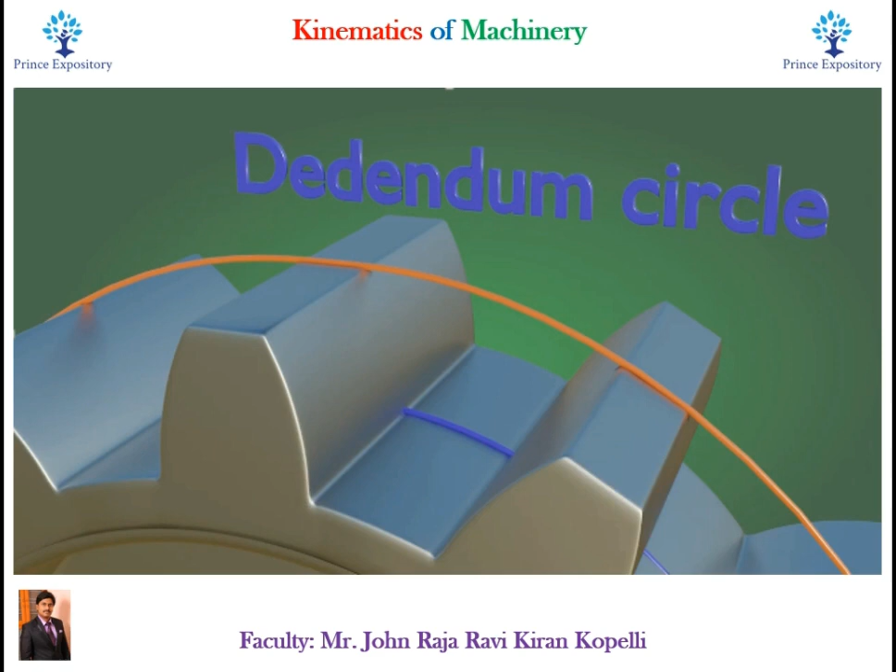Addendum circle. It is a circle drawn through the top of the teeth and is concentric with the pitch circle. Dedendum circle. It is the circle drawn through the bottom of the teeth. It is also called root circle.

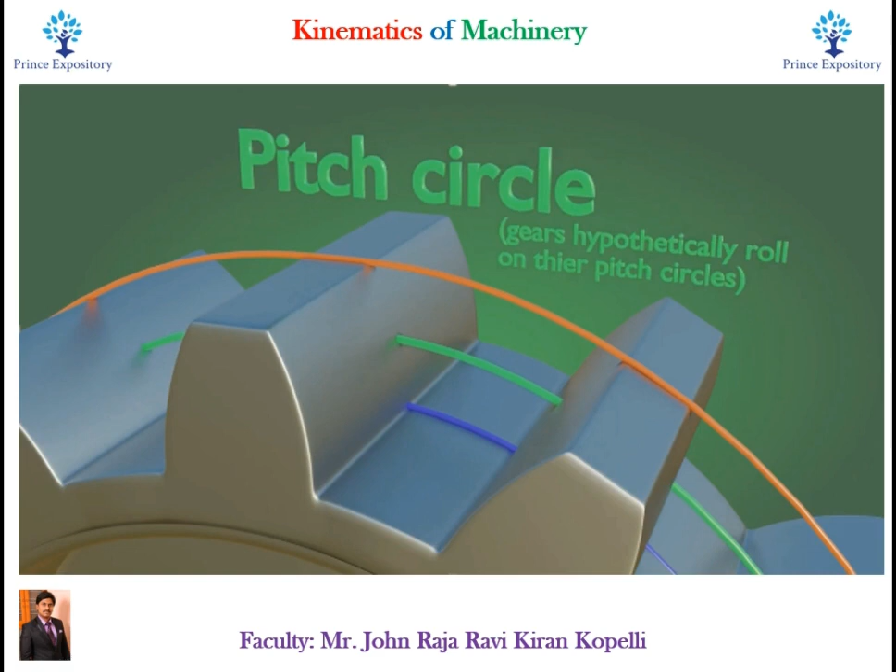Pitch circle. It is an imaginary circle which, by pure rolling action, would give the same motion as the actual gear. Pitch circle diameter is the diameter of the pitch circle. The size of the gear is usually measured with the help of this pitch circle diameter. It is also known as pitch diameter.

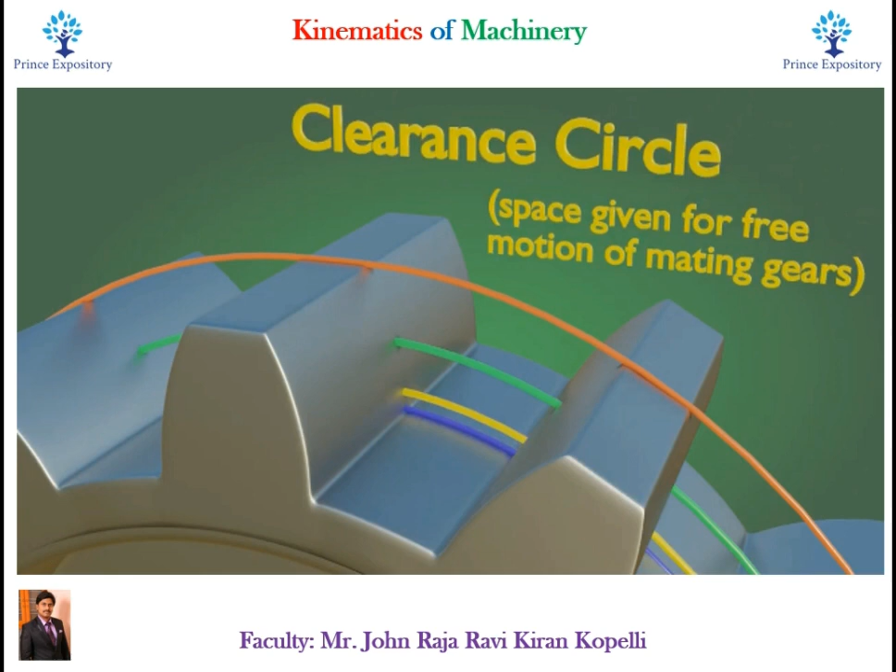Clearance circle. A circle passing through the top of the meshing gear is known as clearance circle, and clearance is the radial distance from the top of the tooth to the bottom of the tooth in a meshing gear.

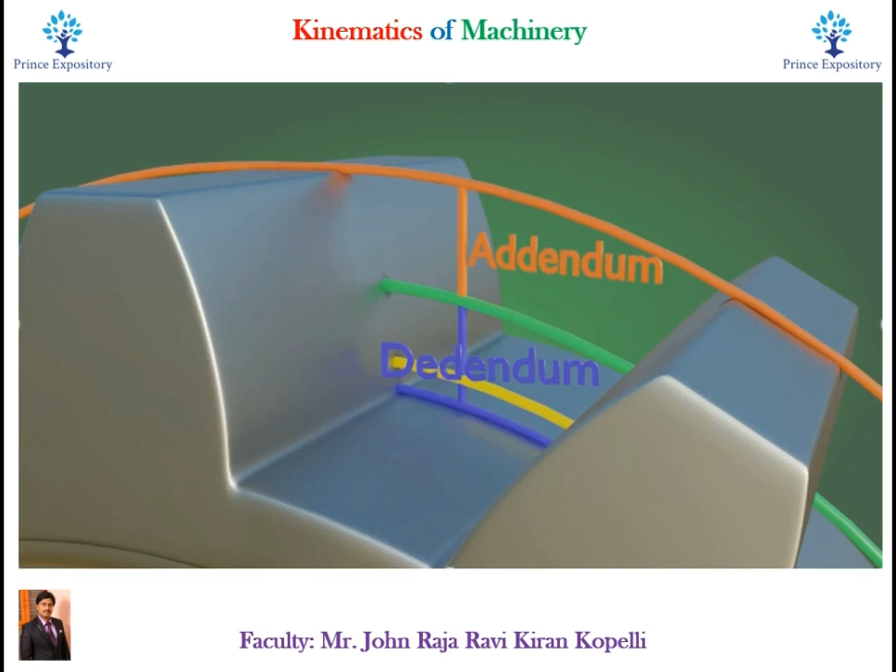Addendum. It is the radial distance of a tooth from the pitch circle to the top of the tooth. Dedendum. It is the radial distance of a tooth from the pitch circle to the bottom of the tooth. Total depth. It is the radial distance between the addendum and the dedendum circles of a gear. It is equal to the sum of the addendum and the dedendum.

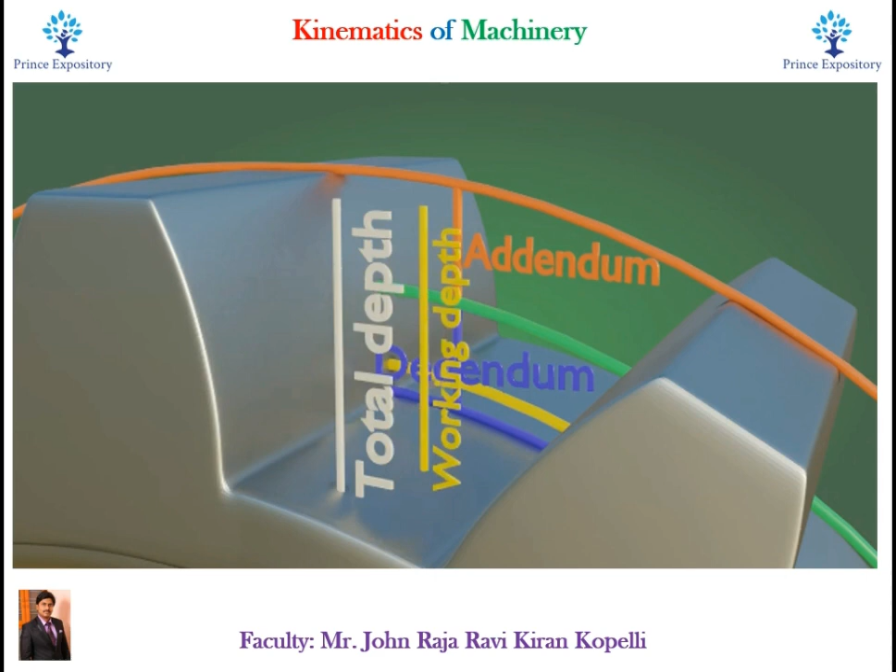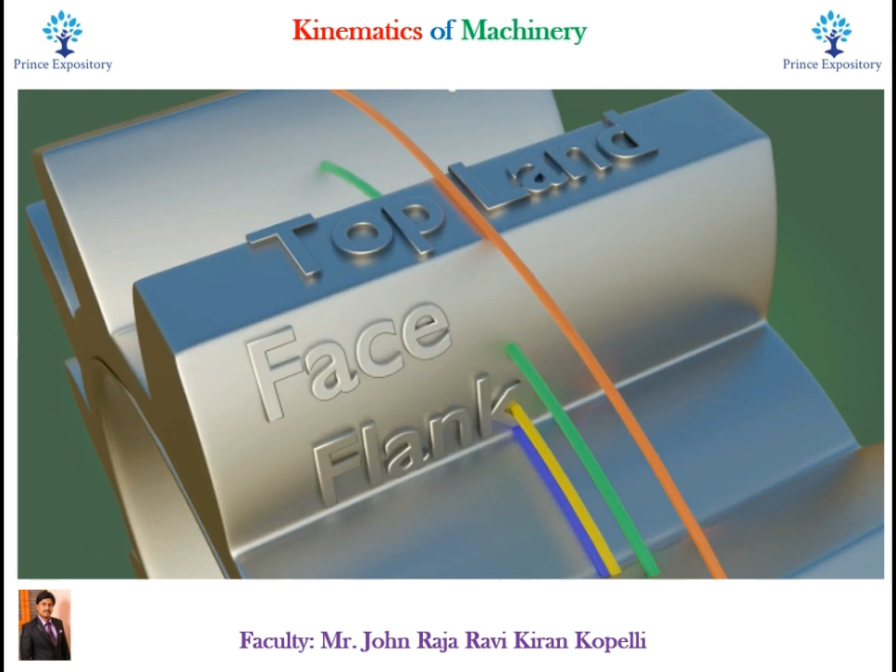Working depth. It is the radial distance from the addendum circle to the clearance circle and is equal to the sum of the addendum of the two meshing gears. Topland. It is the surface of the top of the tooth. Face. It is the surface of the gear tooth above the pitch surface. Flank. It is the surface of the gear tooth below the pitch surface.

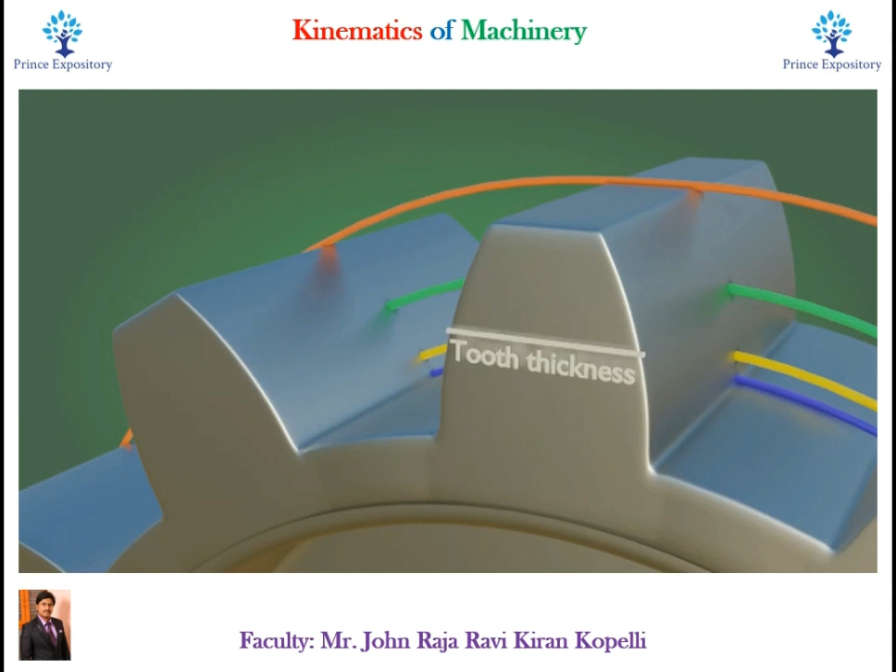Face width. It is the width of the gear tooth measured parallel to its axis. Tooth thickness. It is the width of the tooth measured along the pitch circle. Tooth space. It is the width of space between the two adjacent teeth measured along the pitch circle.

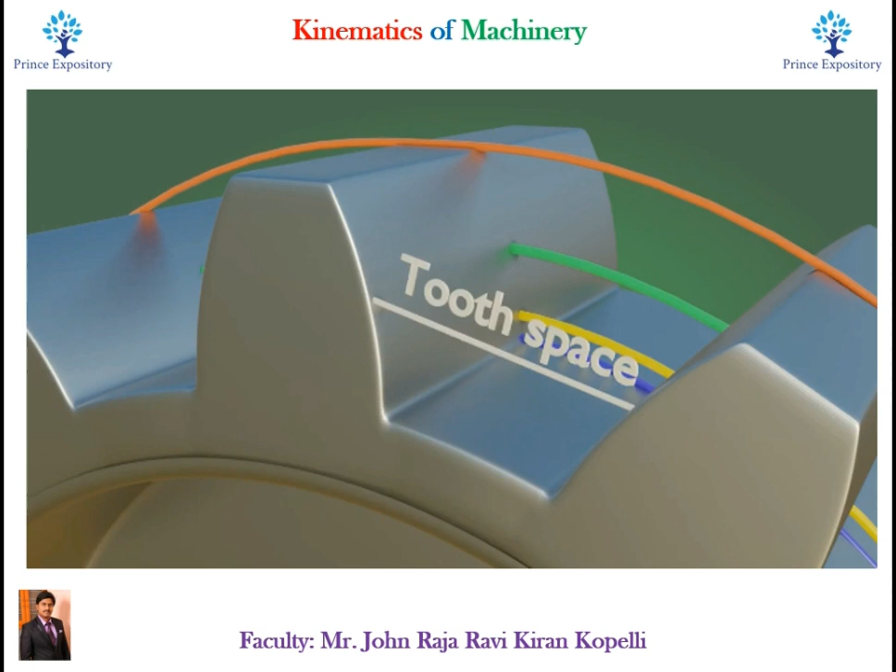Circular pitch. It is the distance measured on the circumference of the pitch circle from a point of one tooth to the corresponding point on the next tooth. It is usually denoted by Pc. Circular pitch Pc is equal to πD divided by T.

In addition to the terminology which we have learned, there are other terms, namely module. It is the ratio of the pitch circle diameter in millimeters to the number of teeth. It is usually denoted by small m. Small m is equal to capital D by capital T.

Profile. It is the curve formed by the face and flank of the tooth. Fillet radius. It is the radius that connects the root circle to the profile of the tooth.

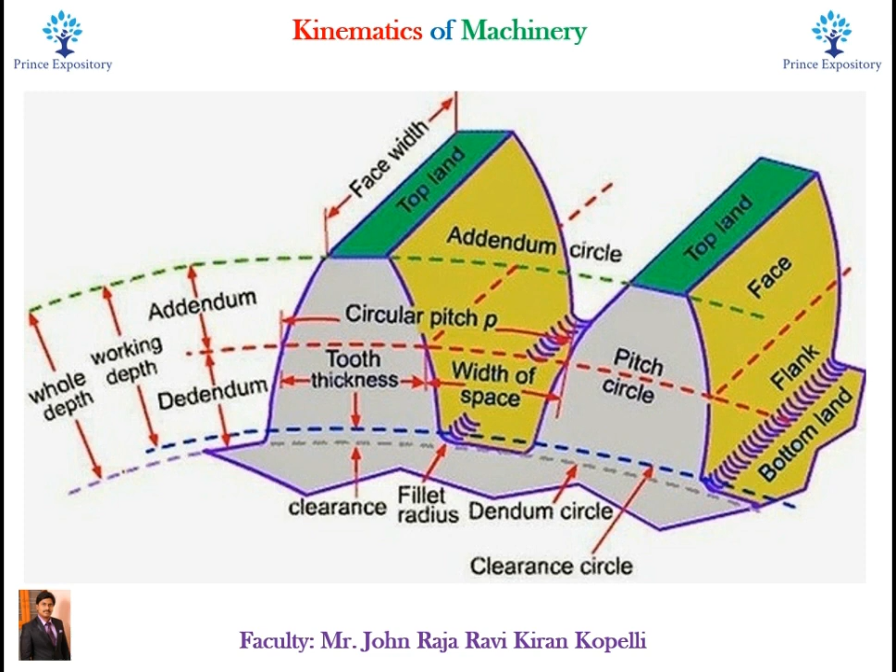Length of path of contact. It is the length of the common normal cut off by the addendum circles of the wheel and pinion. Path of contact. It is the path traced by a point of contact of two teeth from the beginning to the end of engagement.

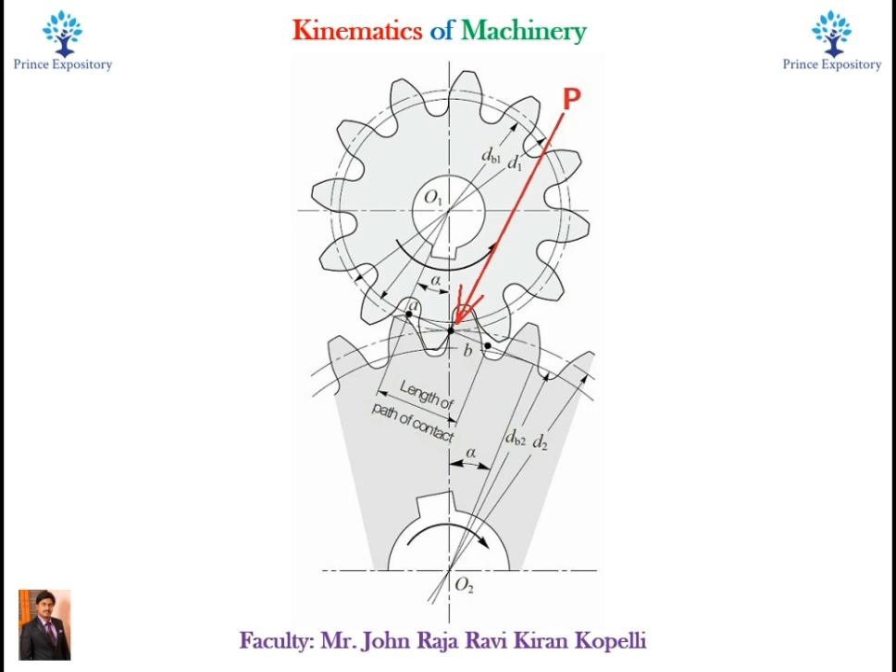Pressure angle. It is also called angle of obliquity. Pressure angle is the angle between the common normal to two gear teeth at the point of contact and the common tangent at the pitch point. It is usually denoted by φ. The standard pressure angles are 14.5 degrees and 20 degrees.